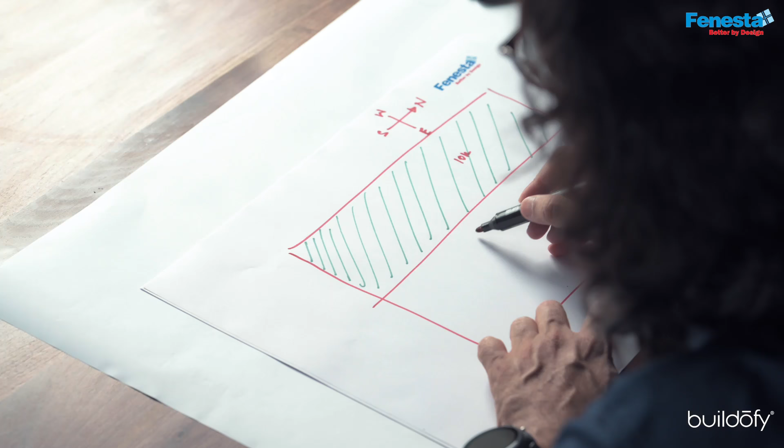The front part we have to think of as a garden. Now here the real challenges start, because when the house is majorly facing southwest, we need to be very careful about hot sun penetrating and the ample light which is penetrating in the house. Our major house location which we have to think about is this region.

One wall which is actually the guiding wall, actually divides this particular house into 2 segments. We have come across certain lines which are creating certain folds.

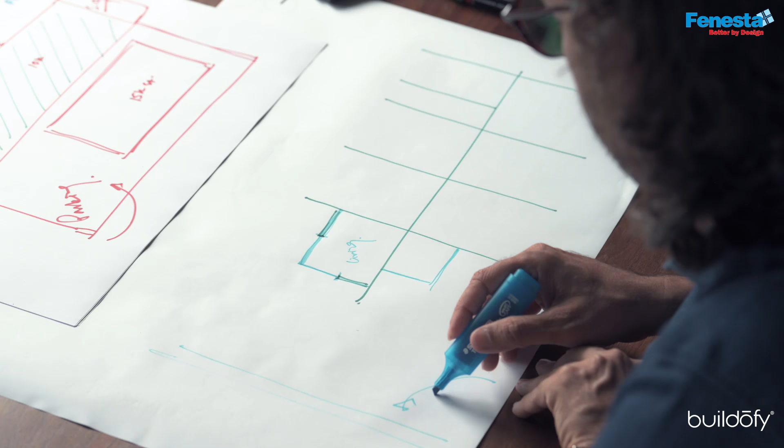When a person parks the car, they come to this area having nice steps in the front. So the moment we come in, we practically see the outside area which is a nice green connect. When we start walking inside, we come across a small puja room here where the lift is in the front. The lift is always a piece of art because it's an experience going up and down.

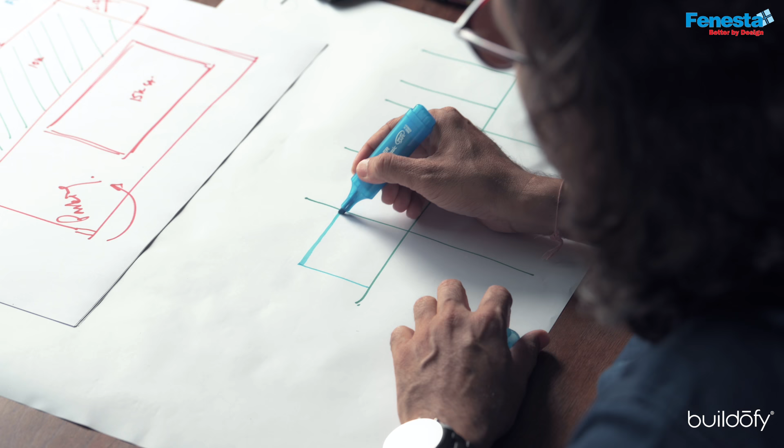The corner which is falling between these 2 concrete folds, which we have thought of as a living room, is actually facing the garden. So the design of that particular area is such that we have provided certain louvers that allow us to exchange the air. We have also planted certain big size trees, which in future will give a good cover to this particular glass.

After the lift, there is a very important place which is the steps. Going up, the steps are metal folded steps, which give a nice slickness without killing any of the functionality, but give a nice look and feel. The back of the steps has a concrete wall with a number of perforations which allow the west light to penetrate in, creating a beautiful sciography overall during the daytime and particularly in the evening.

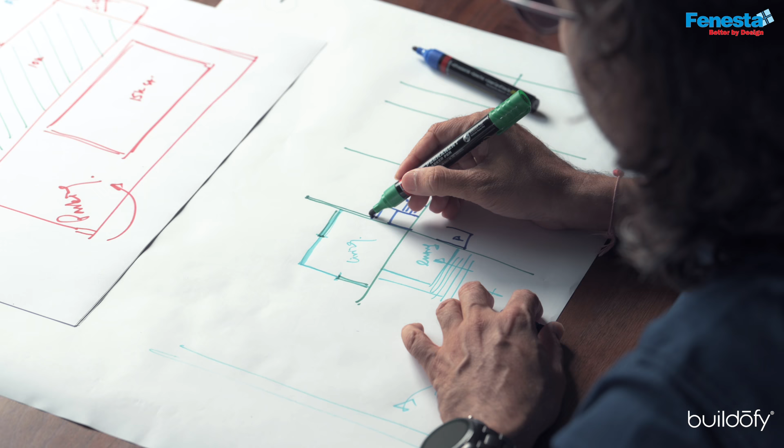Now what we're left with is a nice outside courtyard where we have planted 3 trees in a way that in future they will come up with nice canopies. We have provided certain flexi material which allows us to create nice shades in the daytime, and this is a kind of informal living room, directly connected to the garden, absolutely outdoor, but at the same time creating a nice covered area which gives the warmth of a family gathering.

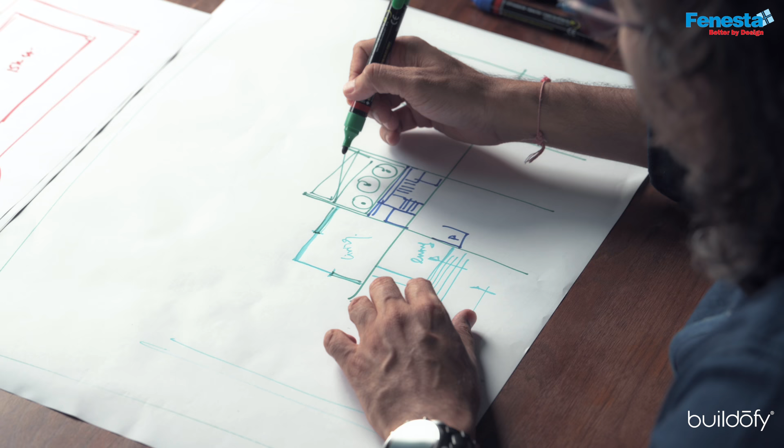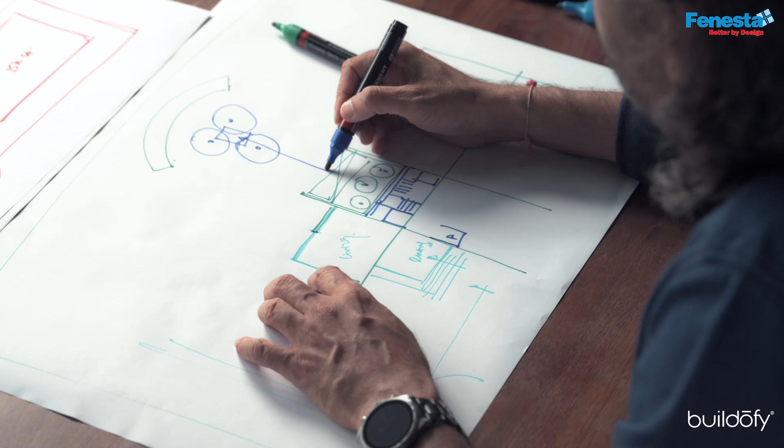In front of this gazebo, we have created a nice counter with canopies of ulta chhata, you can say, which provides nice sit-outs over there. Our major idea is to connect the landscape with the hardscape seamlessly.

Here we are going further down with the passage which connects to different parts of the house, where this corner has been designed as the dining area, and this part has been designed as the owner's kitchen, which is well connected with the dining and quite open to both areas. This is the utility kitchen, made out of prefab structure.

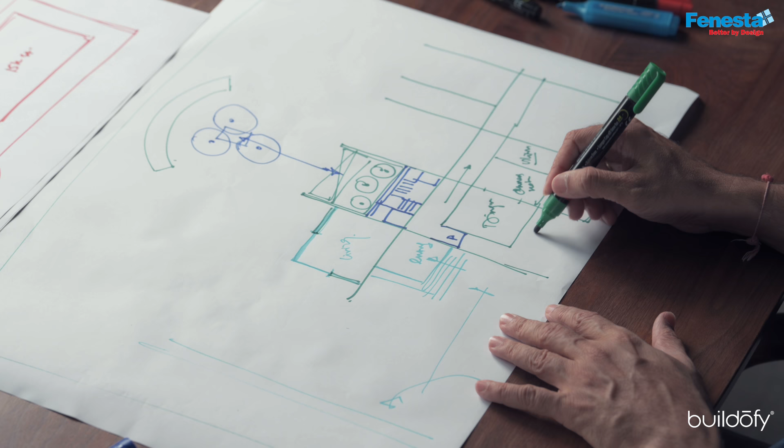This fold of concrete which falls into the east side is creating a nice outdoor sit-out in the morning, which again connects with lots of green space on the other side.

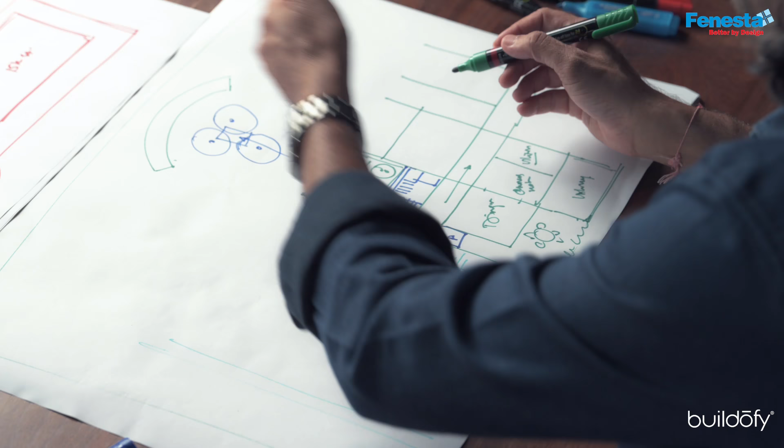When we go further towards the west side, this we have created as a family room. The family room has also been created in a way that whenever needed, to control the air conditioning and the noise, we can have nice folded shutters. Then again it's directly connected with the garden, and here also there is a nice covered deck provided.

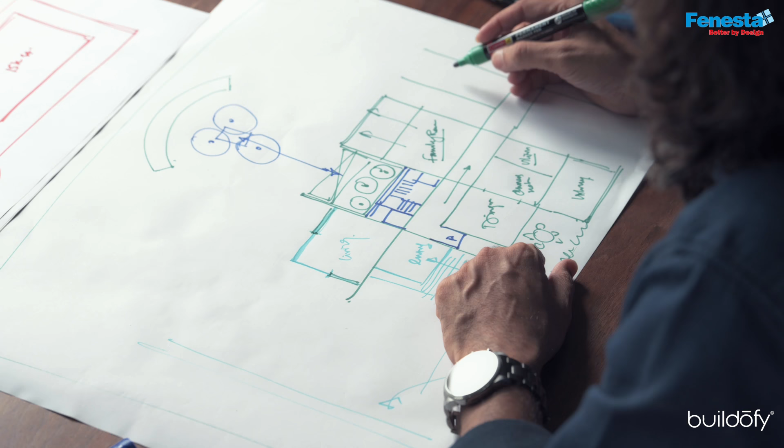Then it comes in the southwest, which is the master bedroom. So one master bedroom at the ground level and the master bedroom on the upper level. The other area is the guest bedroom on one side. So in totality there are 2 bedrooms at the ground level and 3 bedrooms on the upper level.

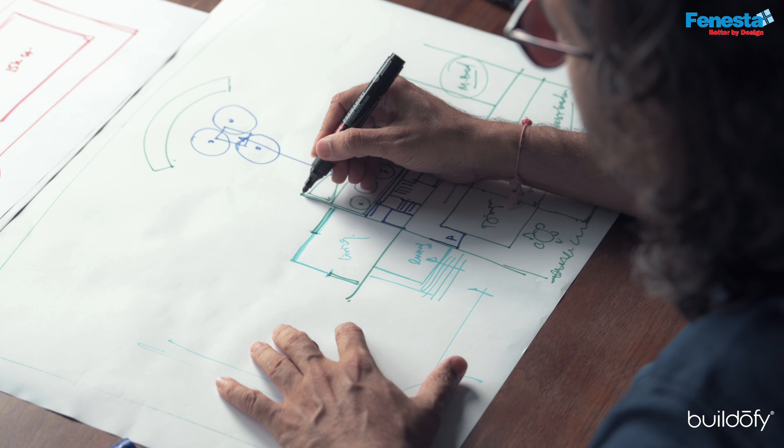So the house layout is very simple, very linear. The core material is concrete. The folded house is made of the peripheral concrete fins. So when you see, these are the concrete fins which are quite influential and hold one mass of living. The living room is about 16 feet high, which gives a nice volumetric impact overall.

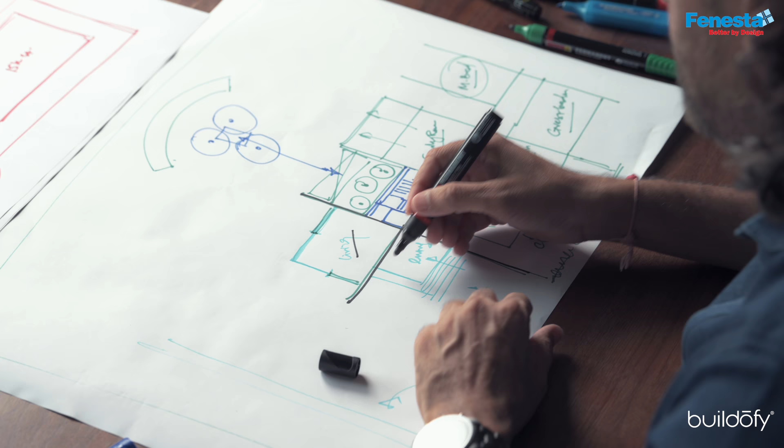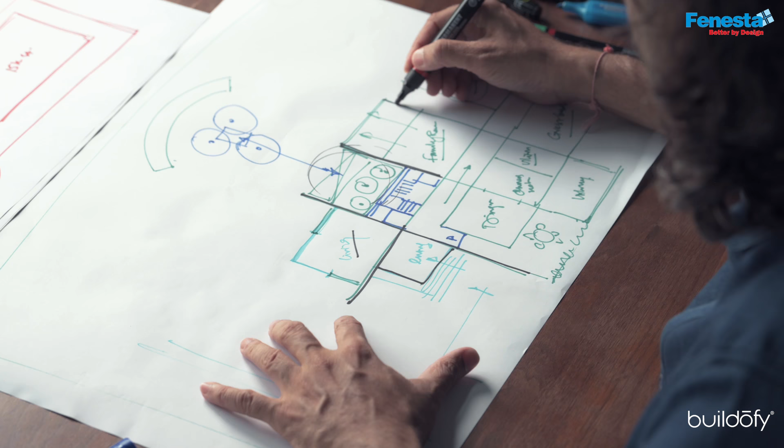On the other side, it creates the mass of the entry, which is at the regular height. At the same time, another fold of concrete gives a beautiful outdoor gazebo, which is well settled between the living and family room. So one more concrete fold, after the living room, gives diversion to the bedroom, and then we have added a few concrete fins here, and there is one more concrete fold towards the dining side.

So overall, when we talk about the massing of concrete and the fold which holds all the areas one after the other, the major idea is to create an interactive house with outside and inside, and that is what we have tried to attain.